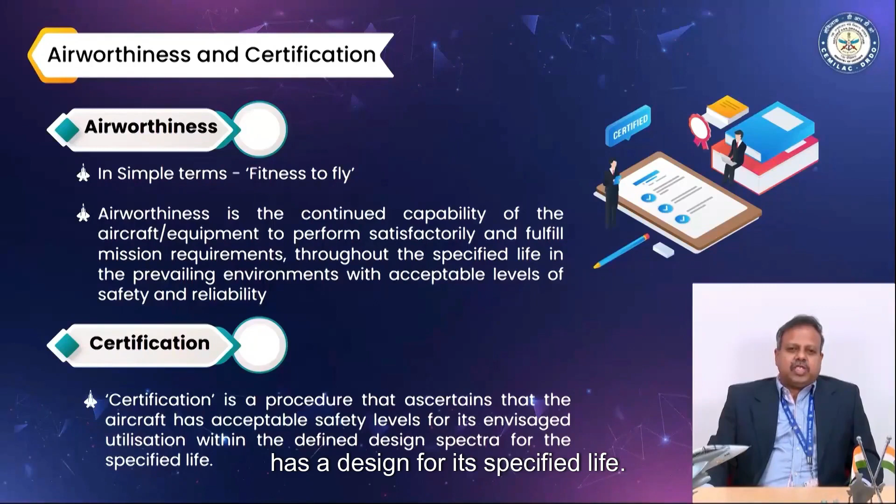Airworthiness coverage spans the entire life cycle of the aircraft. It is from the conception to the retirement of the aircraft. Certification done during the development phase at every phase of development till the aircraft is safely delivered amounts to concurrent certification coverage. And in service, the aircraft would undergo upgrades for obsolescence management, modifications to enhance its capability, life extension, repairs, and the certification at this phase is called the continued airworthiness coverage.

Essentially, there are three approaches. If the designer does the certification, so to speak, a self-certification based on a cell or an airworthiness group within his own department, then we call it first-party certification. If the user who accepts the aircraft has got the necessary wherewithal and the test facility to undertake certification, then it's called second-party certification. But instead, if there is a totally new independent airworthiness authority or an organization who's empowered to do the certification and who's neutral, we call it third-party certification.

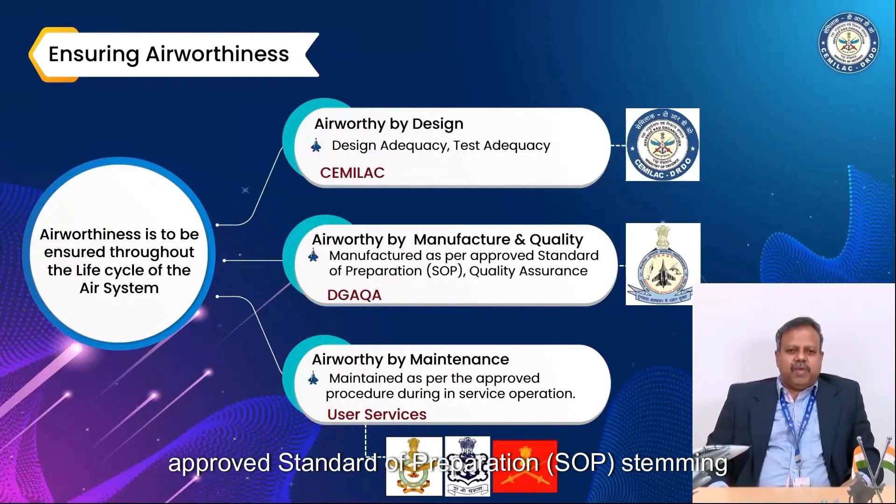When we say ensuring airworthiness all through the life cycle of the air system, what it essentially boils down to is three phases of certification. The product should be airworthy by design, wherein it is evaluated for its design adequacy and test adequacy, and this is done by CEMILAC. And then the product should be airworthy by manufacture and quality, which means the approved standard of preparation stemming from the design evaluation with the quality assurance in place is undertaken by DGAQA.

And then the aircraft should be airworthy by maintenance, which means at every given point of time, the aircraft should be ready to fly, fit to do its intended purpose by ensuring proper maintenance and servicing in place based on the approved procedure, and this is undertaken by the user services. All these activities, the technical requirements, are captured and regulated through this document, the Design, Development, Production of Military Air Systems and Airborne Stores. This is the procedural and regulatory document that regulates military airworthiness in India during design, development, manufacture of products for Indian military application.

This document was first released in the year 1975. It was inspired by the UK MOD Def Stan 05-123. Some of our erstwhile aircraft like the Ajeet, HPT-32, Ajeet Trainer and Kiran have greatly benefited from the processes and procedures brought out in this document.

2.5 decades later, the growth in military aviation technology manifested in newer generations of aircraft: the fighter aircraft, the naval aircraft, the trainer aircraft, the transport aircraft, the UAVs and different classes of helicopters, and each of these requirements had to be updated in the document, and hence the second version, DDP-MAS 2002, was released in the year 2002, incorporating all the necessary upgrades that were needed at that point of time.

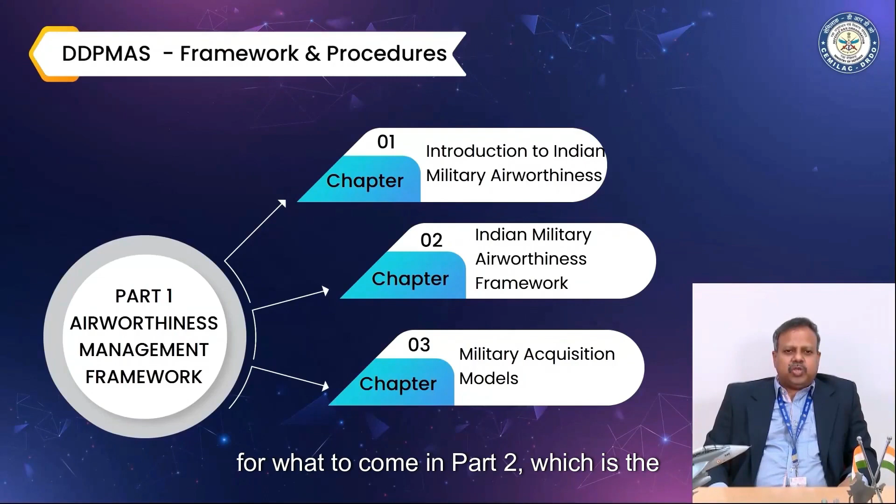So let us look at what the framework document contains. The DDP MAS framework and procedure document consists of two parts. The first part serves as an introduction to Indian military airworthiness and framework, and the second part contains the policy for the design, development, production and certification of air systems and airborne stores. The first part is further divided into 3 chapters: chapter 1, Introduction to Indian Military Airworthiness, chapter 2, the Indian Military Airworthiness Framework, and chapter 3, military acquisition models. This part is aimed at introducing the reader to the Indian Military Airworthiness Framework and sets the tone for what's to come in part 2, which is the policy of DDP MAS.

The policy part is divided into 12 chapters. The policy requirements for ab initio development, license production and bought out aircraft are brought out in chapters 1, 2 and 3. Then the requirements of continued airworthiness and continuing airworthiness are brought out in chapter 4. Policy level requirements of flight testing are brought out in chapter 5, and there are chapters that have been introduced for the first time in DDP MAS, chapter 6 to chapter 11, which are unmanned aircraft systems, air-launched missiles, research air systems, civil certified military aircraft, export of indigenous air systems, and organization approval, and chapter 12, which talks of indigenous substitution.

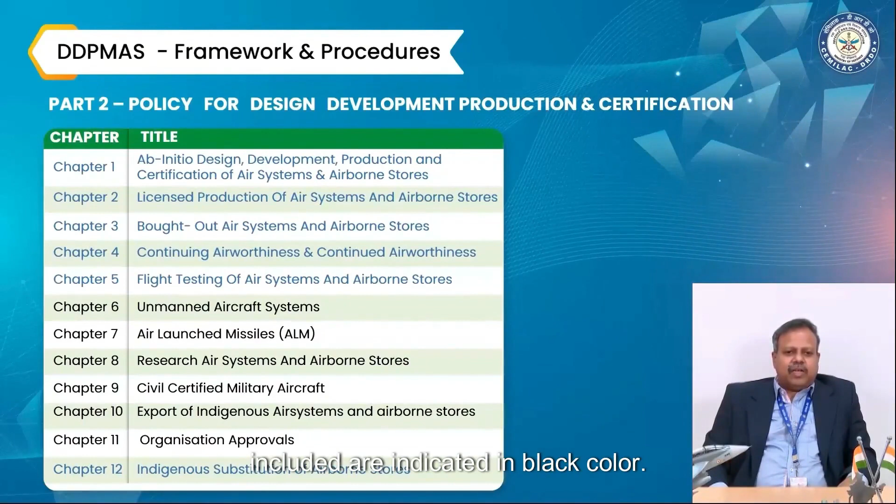If we go to the second tier, which is the regulations, it is called IMTAR 21, Indian Military Technical Airworthiness Requirements 21. These are basically regulations which are put into 19 subparts. Each subpart contains all the applicable requirements within the scope of the subpart title, and each regulation covers the technical airworthiness requirement for the air system and the airborne stores.

If we take a deeper look at each subpart, it is further divided into the rationale, which says what should be the basis for this regulation. It lists the contents of all the regulations that are needed within that subpart title. It lists the regulations, which are uniquely numbered and act as the regulatory article which must be followed towards airworthiness, and acceptable means of compliance, which are non-exclusive means of demonstrating compliance with technical airworthiness. If there are alternate means, those are also listed to help the designers, and guidance material is also listed which facilitates meeting the acceptable means of compliance, thereby helping the designers meet the regulations.

Taking a closer look, subpart A is general procedure, and the requirements for ab initio development of air systems, aircraft, UAS, air-launched missiles and engines are brought out in subpart B, and the ones for airborne stores are brought out in subpart C, along with requirements for materials and software.

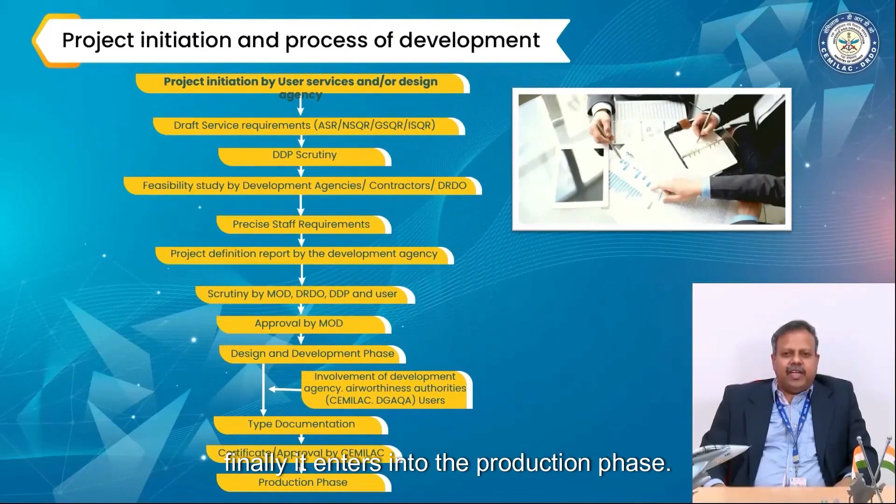Ab initio development, which is the most critical part of the entire processes, involves the design evaluation and the test adequacy. The design is evaluated through a series of reviews defined by the PDRs and the CDRs, and then there is the testing that happens. The outcome of the testing goes into the design, and the whole iteration process continues till the design is brought to a level of maturity, and then the product is realized.

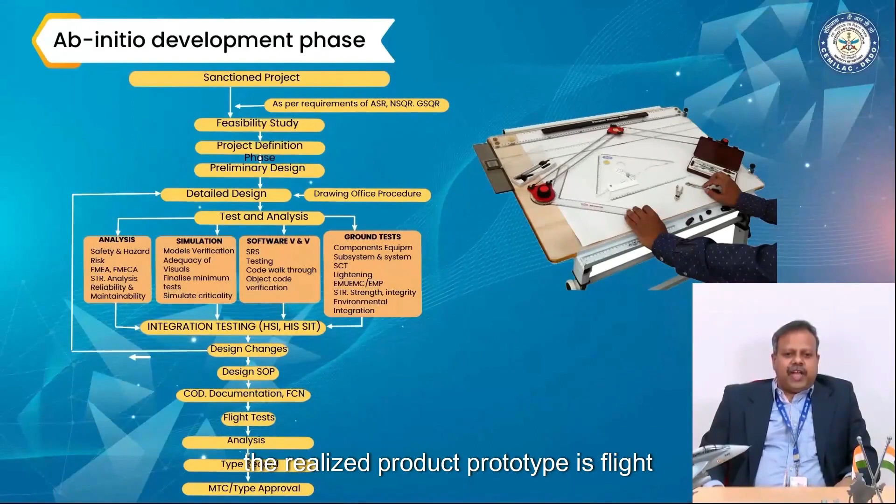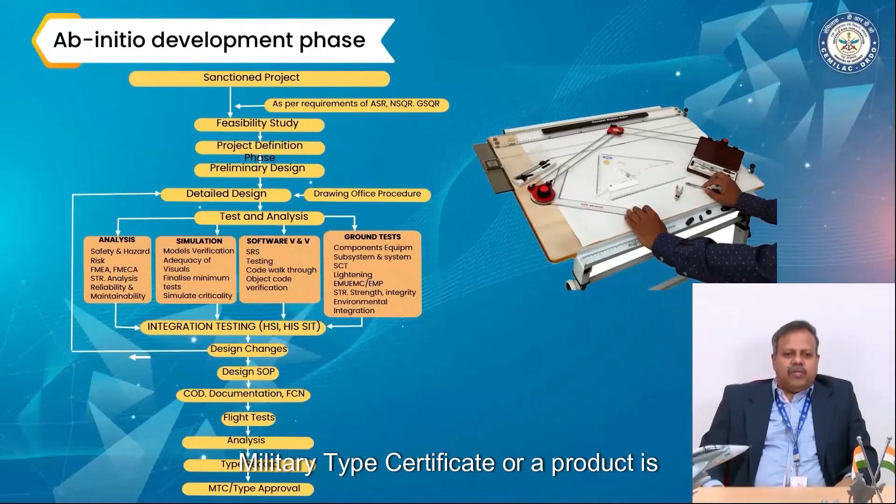The realized product prototype is flight tested, and the outcome of the flight testing feeds back into the design iteratively to improve the design. And once the flight testing is completed, based on the analysis, the certification is issued, and finally the aircraft is issued with the military type certificate, or a product is given a type approval along with the RSD and released to the service.

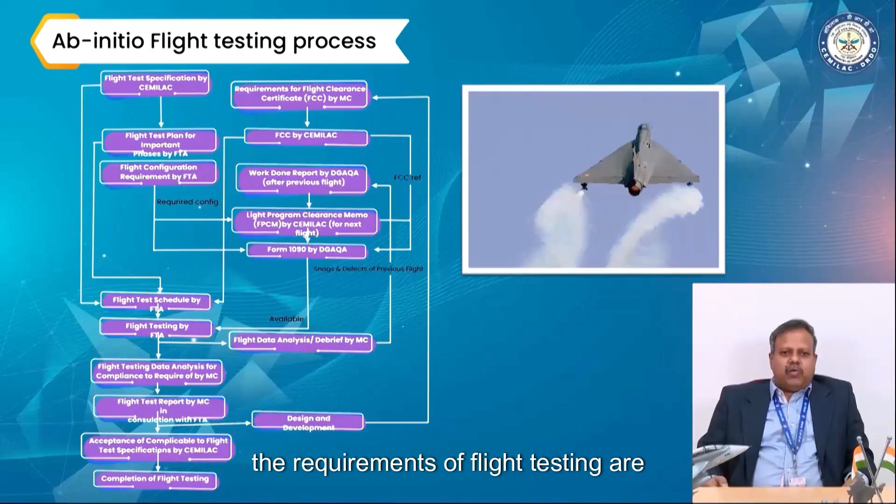Requirements for ab initio flight testing are adequately captured in this document. Flight testing is an important phase of development because an unproven platform or an unproven LRU or an unproven modification is tested for the first time. Therefore, a very careful, cautious, progressive clearance with staircase approach is adopted during flight testing, starting with the flight test requirements, the flight test plan, the flight test schedule, and the FCC, or the flight clearance certificate, that is issued for prescribed envelopes. This flight testing is completed when all the requirements of flight testing are demonstrated and complied with.

Production is a phase which starts when the development is complete, and the starting point of production is freezing the drawings and the equipment standard of preparation. During production, there could be concessions, there could be deviations, and there are modifications and alterations that are coming in, and adequate provisions are in place in this document to address each of the paths that the production may follow.

And finally, necessary requirements for testing of the produced item are also in place in this document, both for ground and for flight testing. And once all these activities towards production are completed, then the aircraft is delivered and inducted into the services. This is the most important phase because this is the phase where a product that is airworthy by design, which is on paper, is translated to a product that is airworthy by manufacture, quality, and production.

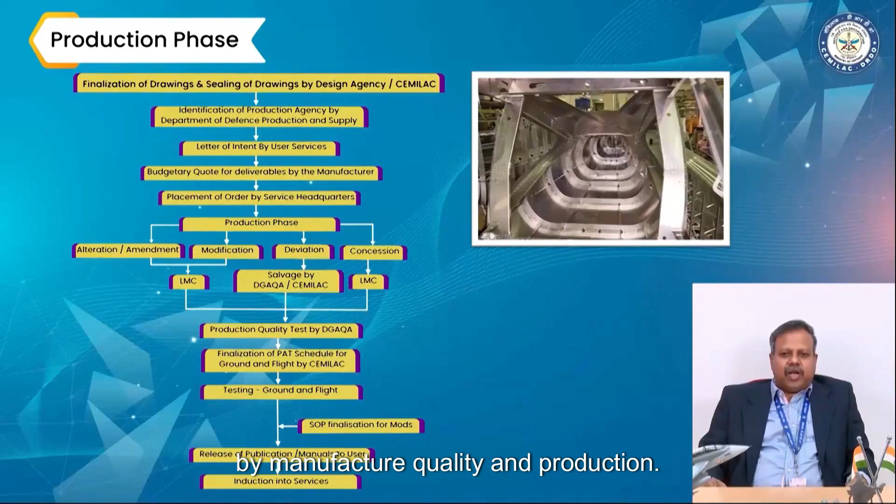During the life cycle of the aircraft, it may be required that an LRU be replaced with an indigenous one. This is called the indigenous substitution. Adequate provisions are in place to address the development of indigenous products. Firstly, defining them critical and non-critical, and depending on its criticality classification, the provisions are in place to take the product to its fruitful completion towards successful indigenization of the products.

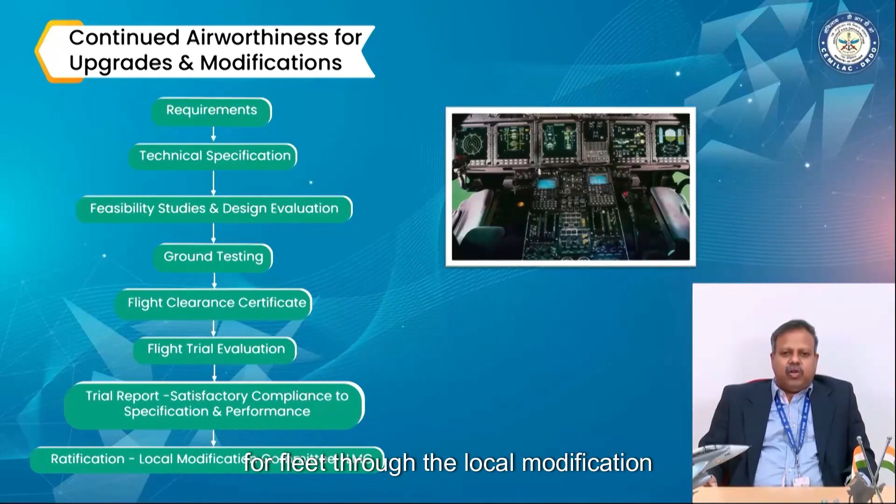Aircraft in service can undergo upgrades and modifications. The requirements for continued airworthiness coverage are well brought out in this document. It starts with design evaluation and testing, both ground and flight. Flight trial evaluation reports are studied. Upon satisfactory completion, the whole modifications or the upgrades are ratified for fleet through the local modification committee, otherwise called the LMC.

Let us look at some of the broad benefits envisaged for various stakeholders. Firstly, the user services. The user services are involved during the concurrent design and development activities.

For research air systems and airborne stores, the user services have delegated roles of the airworthiness authorities, and for non-critical items being developed by BRDs and its equivalent organizations within the services, there is a lot more flexibility and freedom to the acceptance of non-critical items. And for critical airborne equipment, the user services can source them from multiple vendors through the IMTSO scheme.

For the flight test agencies, the flight test plans and the flight test schedules are completely in the domain of the flight test agencies, and there is a lot more freedom when it comes to the block clearance concepts, which are well elaborated and captured at the policy level, and a lot more privileges are envisaged for the flight test agencies of the main contractor through the organization approval schemes.

For research and development production organizations, the whole document is brought out in a process-dependent approach stemming from the principles of system engineering. There is an enhanced role for the internal quality assurance department, especially in the areas of unmanned air systems and air-launched missiles. There is gradual self-certification through organization approval schemes, and several provisions for novel and unique R&D initiatives have been enabled in this document.

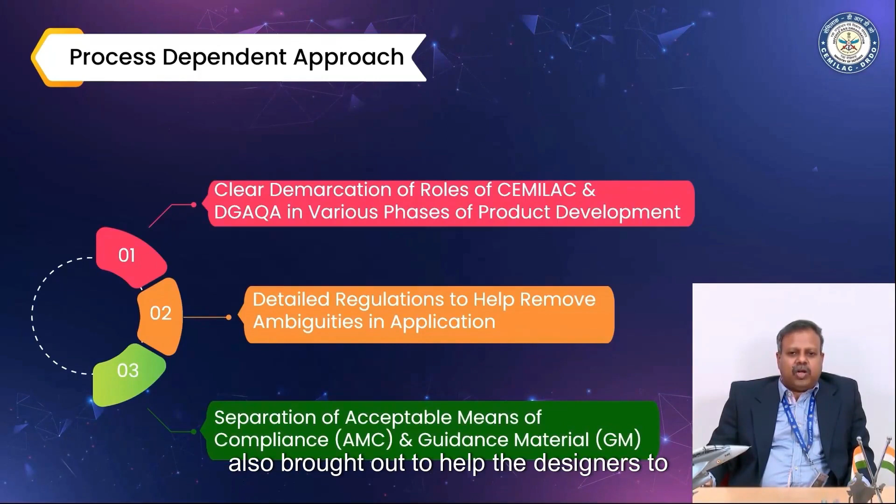This document is process dependent. There are clear demarcations of roles of CEMILAC and DGAQA at various phases of product development. Detailed regulations are given to help remove ambiguities in application, and separate acceptable means of compliance and guidance material are also brought out to help the designers to process for the airworthiness and certification.

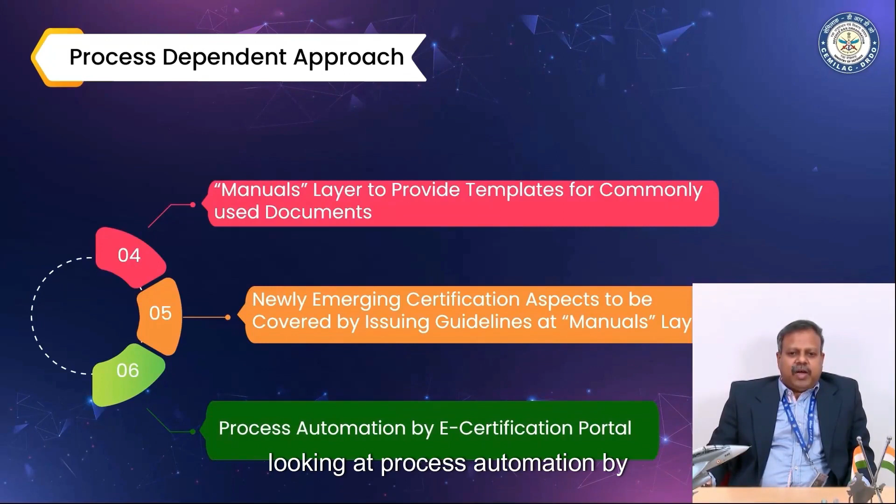A manual layer has been introduced which will be contemporary. It will be built up dynamically, which will enable the developers to use them towards meeting the requirements, and in order to save time, CEMILAC is also looking at process automation by an e-certification portal to be introduced in days to come.

The organization approval scheme has been brought in this document, and this is basically to give enhanced delegation to industries, and they are under three categories: the design organization approval scheme, the production organization approval scheme, and the maintenance organization approval scheme. These are given at two levels, the air system and the airborne stores level, and based on the approval, the industries and the organizations can have enhanced delegations in the form of privileges to undertake certain D&D and QA activities, and this is a step towards gradual self-certification in certain areas to come.

A new chapter on exports of air systems and airborne stores has been introduced. This is to facilitate our Indian industries to develop products which are certified in the country and that could be exported to foreign countries. A separate chapter for research air systems and airborne stores has been included. This is to enable novel and unique R&D initiatives. Industries can pursue innovations and research even without a firm order from the user services with delegated roles.

With all this in place, we have now come to the conclusion of this talk. The new DDP MAS is brought out in a three-tier layered and structured approach which facilitates ease of comprehension and implementation. It is in line with the international approach wherein it facilitates global defense cooperation and airworthiness mutual recognition. It is also in line with the government defense policies in design, manufacture and exports. It is process dependent, and enhanced delegation through organization approval schemes has been adequately brought out in this